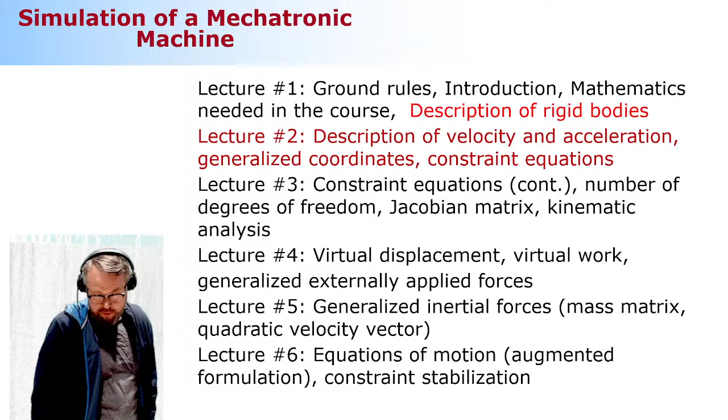Okay, let's get started. Multibody system dynamics — what is a multibody system? As the title implies, it's a system that consists of multiple bodies. But there's another requirement the multibody system has to fulfill: the bodies have to be connected together via joints. Joints limit the motion possibilities between neighboring bodies.

A crankshaft mechanism is a good example. The connecting rod isn't able to move as it wants, but according to the crankshaft and a piston. So it connects these two bodies together, and it has to do this connection job all the time.

So it cannot take a leave and go someplace else. That's not possible because it's connected to neighboring bodies. Those are called joints, which mathematically we're going to describe by relating the motion possibilities between the neighboring bodies.

It all sounds vague, but it becomes clear when we look at it at a mathematical level. That's going to be two weeks from now.

So in multibody system dynamics, we do not make any assumption regarding the magnitude of rotation. Seems like a simple thing, but it's not. Because if we are not going to limit ourselves to small rotations, it means our kinematics is going to be nonlinear, and our equation of motion will be nonlinear. That has serious consequences for our life.

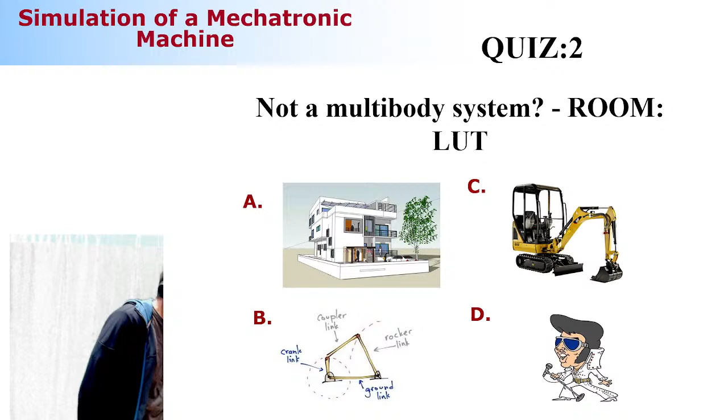What is the success rate today? How many of you will enter the correct answer? Is it going to be 100%, 50%, 10%? Statistically, is it 25%? 92, okay, the online participants too. We got 53 online participants, and I'm sure they're all very happy. Are they? They're not giving any comments whatsoever. Anyway, online participants, place the number in the chat window, and if you guess this correctly you can get 2 extra points. And the numbers are coming now, 94. We'll get back to the right number a bit later. So let me continue then.

Here comes the big picture. This is something you must understand very well. In dynamics, we monitor the situation with respect to a coordinate system called a reference coordinate system. Often you've heard about a global coordinate system — yes, that's a reference coordinate system. It has many names, but it's a coordinate system that everything is computed with respect to.

I can set the reference coordinate system to this table, and I can describe all kinds of motion with respect to that coordinate system. It's not absolute, because there is always motion — if nothing else, Earth is moving around. And because Earth is moving, it is itself a relative coordinate system, yet it's a reference coordinate system for me.

So with respect to the reference coordinate system — would you prefer to call it a global coordinate system? Is that something more familiar to you? Reference is okay, all right.

So with respect to the reference coordinate system, we have a multibody system — that's the mechanism we just described. It could be a connecting rod system or crankshaft mechanism, and it consists of a number of bodies. These bodies are connected together via joints, as you see here. There are different kinds of motion limitations: revolute joints, translational joints, screw joints, and combinations of these. So there are many different varieties, but they're all limiting the motion possibilities. That altogether is a multi-body system.

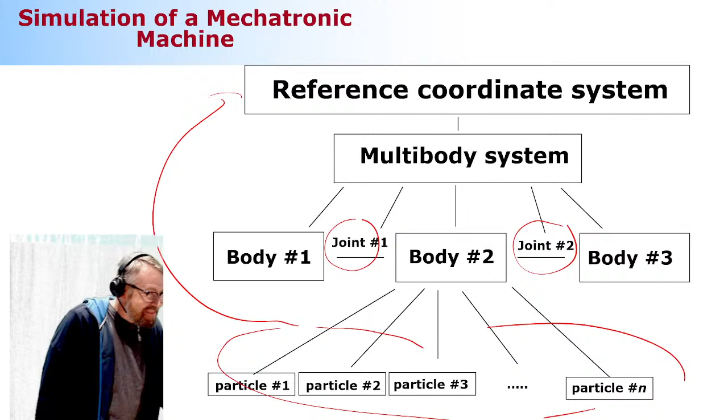Here it is. Here is my body A. So this is my body, even though it consists of an infinite number of particles. Today we're going to look just at 3 of them. Remember that in reality there is much more than that - millions, billions, trillions of particles. But let's, as an example, look at 3 of them to make our life easier.

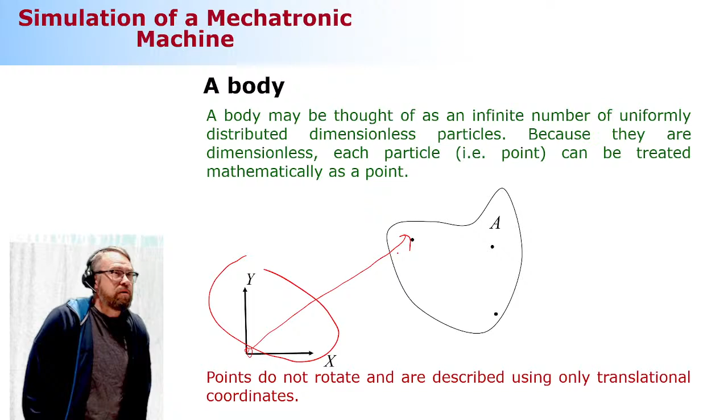So remember, what is our target? Our target is to describe these particles with respect to this reference coordinate system. This is not very complicated at all. How can we do that? We can say there's a vector leaving from the origin of the body - it could be the reference coordinate system - and ending at wherever the particle is located. Very simple. If I do that for each of these 3 particles, it looks like this. Not very complicated at all. So let's look at what this vector consists of.

This vector, obviously, because this is a planar 2-dimensional space, consists of how many components? 2 components, because in a planar case, a vector that starts here and ends here has a projection on the global x and y coordinate axes. These projections are the components of this vector. So this vector here is Rx, Ry - these are the projections. Rx is this projection, that's Rx, and this is Ry. Pretty simple thing.

So what about this guy here? How many components? 2. Correct, 2, because there's no difference. So these two consist of 2 components each. What are these components? Rx, Ry. So it's no different in that respect. What about this one? Same thing, so that's going to be another 2 components.

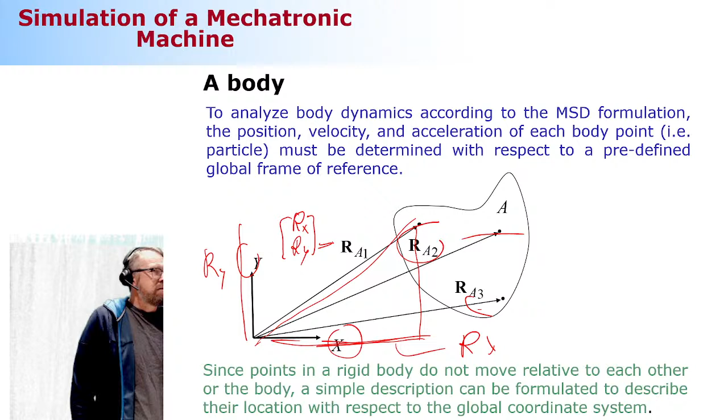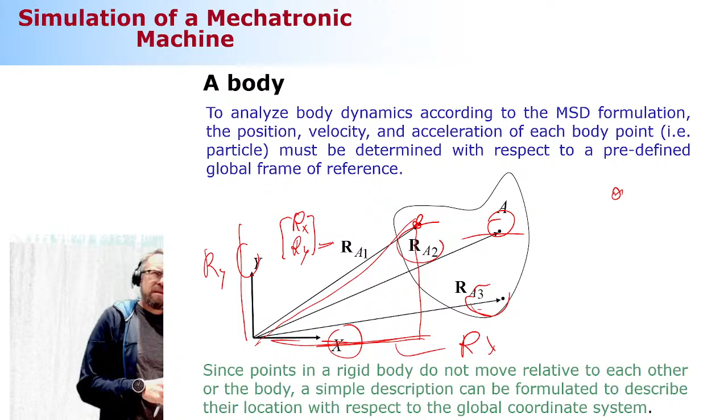So now when I have 3 particles, I need to use 6 variables. Where are these 6 variables coming from? Because this particle can move, and when it does, these projections change their numerical values. So it means these particles have to be described by 2 variables, Rx and Ry, each. The same holds for this guy and this guy. So it means I need to use 6 variables. It's still kind of doable, but remember, how many particles do I have in total? Infinite. So this is a no go. This is not possible, because no computer can solve an infinite number of variables.

They just cannot. It has to be simplified or described another way, otherwise computers will say, hey, this is too much computing for me. And we're still speaking about one single body, and we would like to have more than just one.

Okay, what is it that we can do then? Maybe we can use the fact that particles cannot move with respect to each other if we're dealing with rigid bodies. Rigid body means that no matter how force is imposed on the body, there's no mechanical deformation. Of course, you don't see that in real life - like this pen is pretty rigid, but if I apply a very big force, it will bend for sure. I'm not going to demonstrate that, but trust that it will happen. That's what happens in real life, but we are not here in real life - we are in a computational world. And in this computational world, we say that this is rigid. We're making an assumption that it's rigid, meaning the particles cannot move with respect to each other. They just cannot.

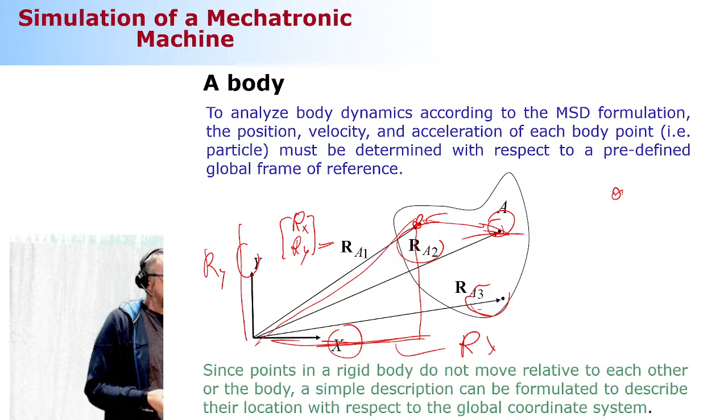Okay, maybe we can use that and introduce a second coordinate system. The second coordinate system is called the body reference coordinate system. What is the deal with this body reference coordinate system? Well, it is a coordinate system that is attached to the body.

So if the body moves, the coordinate system moves along. If the body rotates, it rotates along. It's completely stamped, welded, attached, however you want to call it, to the body. So there's no possibility for particles to move with respect to this body reference coordinate system. That's very good, because then we can describe each one of these particles with respect to this new coordinate system.

We can make it happen, and we can do that by using something that is a constant vector, called vector U bar. In my notation, bar stands for local coordinate description, and if there's no bar, it means it's with the reference coordinate system. And of course, if it is bold font, it means it's either a vector or a matrix. Scalars are written using italic font.

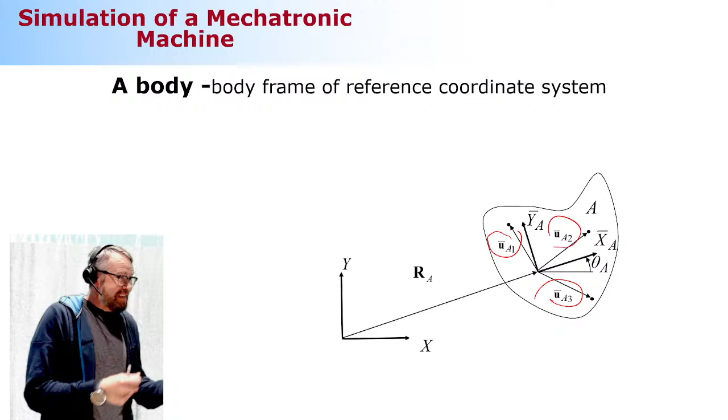Okay, let me take a look, Mustafa, what the... So online participants are not saying anything, meaning that they understand everything. They figured out everything a while ago. Yeah, there's a 5 second delay, but other than that, they understand everything.

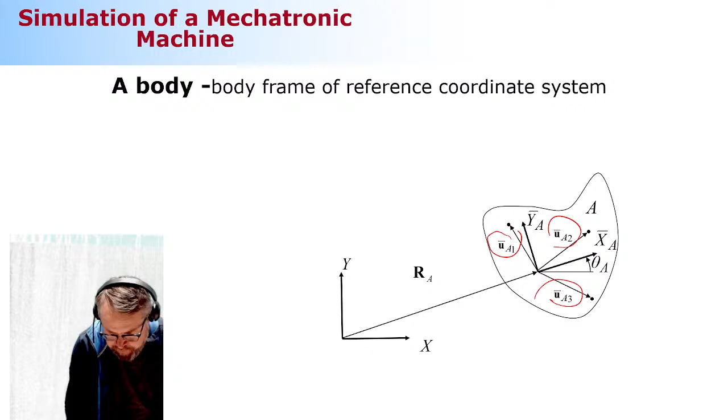Because the one thing is clear: if I add here a vector that starts from the origin of the reference coordinate system and ends at the origin of the body reference coordinate system, that's vector r. And if I add vector u bar there, that cannot give the same position. Why not? Because when the system is rotating, the vector u bar will go in this direction, and it just cannot be the case anymore. So what we need to do is build this relation.

And it's pretty simple mathematics, and that's what we're going to do next. So the mathematics goes this way. Now there is no body visible here, I only have two coordinate systems, the reference coordinate system and the body reference coordinate system. Let's call it the global coordinate system and local coordinate system for sake of simplicity. This is my global coordinate system, and this is my local coordinate system.

You see that the local coordinate system is rotated with respect to the global coordinate system by an amount theta. And then there's a vector described with respect to the local coordinate system, vector u bar. This vector u bar has an angle with respect to the local x-axis which is equal to alpha.

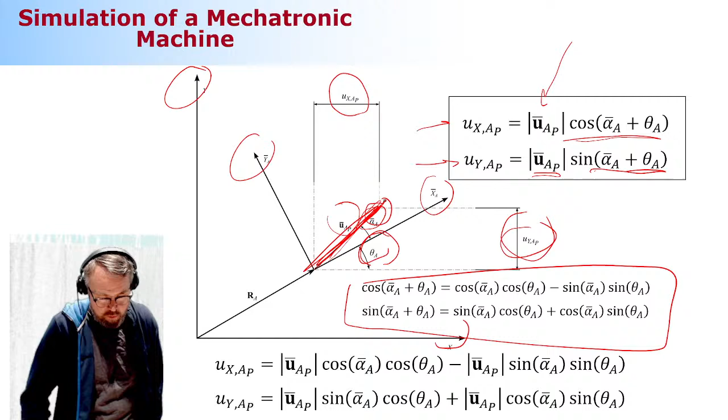So now using this relation, no thinking whatsoever. Remember, this course is not about thinking. As soon as you start thinking, you go wrong. You just go mechanically, okay? So I'm using this relation, and I can write this projection x and y as shown here.

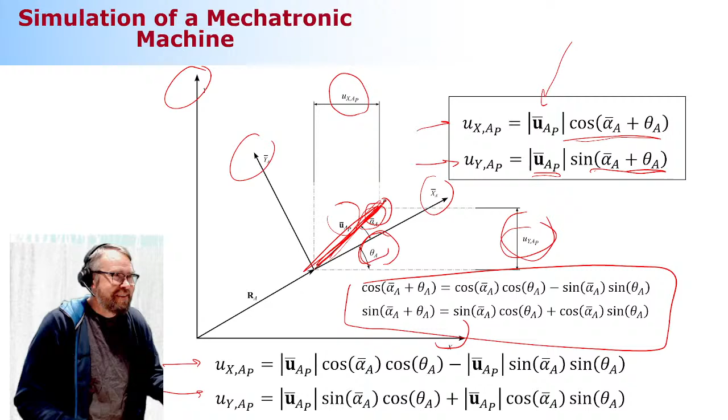Now I can see that it's a little bit of motion like this, so it's no longer just this. Okay, hold on, that all becomes clear in my next slide. You want to see it? Okay, it's this one here. So this is what I just got from the previous slide, and I got that with no thinking - I was just using this trigonometric relation, nothing else.

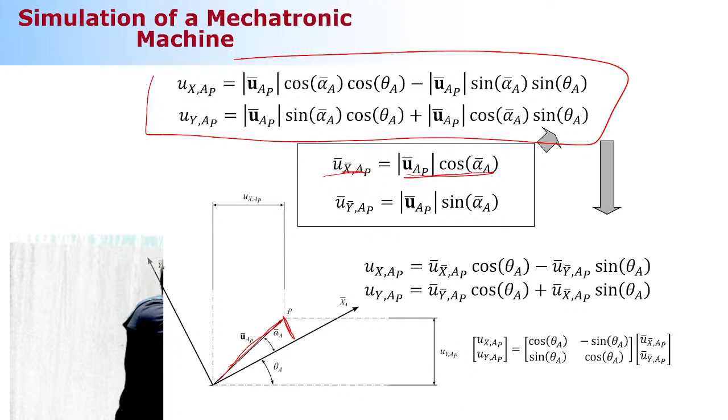Then, if I think about how is a projection of vector u bar x, which is this vector u bar, with respect to local x-axis, how can I write that? Well, this is pretty much the same thing I just did - it's the length of vector u bar multiplied by cosine alpha, this time just alpha because I'm here in my local coordinate system. And then I could do the same for the y component - it's the length of that vector multiplied by sine alpha.

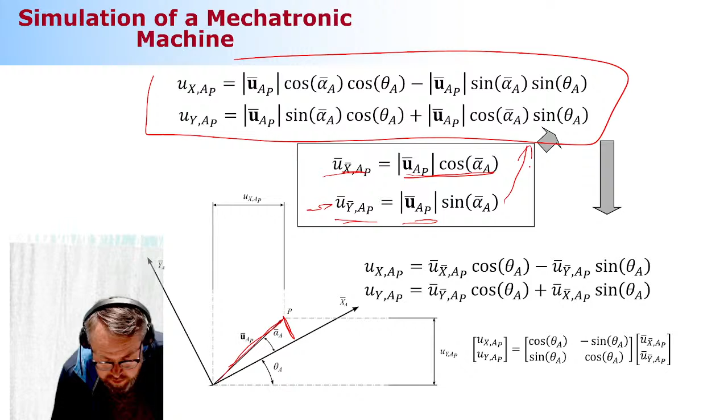So when I'm substituting that relation into the previous equation, I can express everything as shown here. We become very close to solving the mystery about two different coordinate systems, because if you look at this solution here, I have two equations which I can express using vectors and matrix. What are these vectors? Well, these vectors are the representation in a global coordinate system, this guy, and the representation in a local coordinate system, and something that converts local to global.

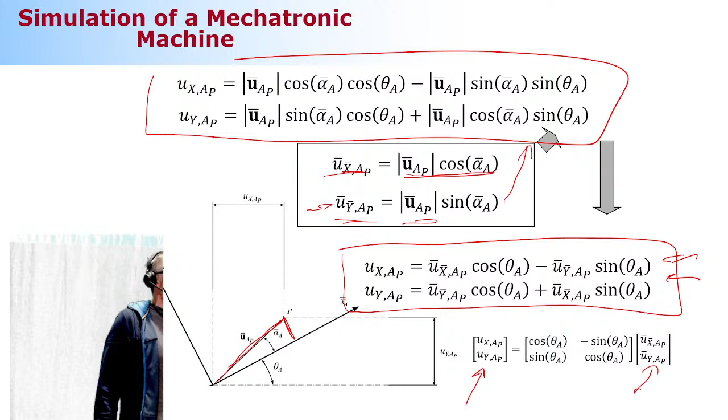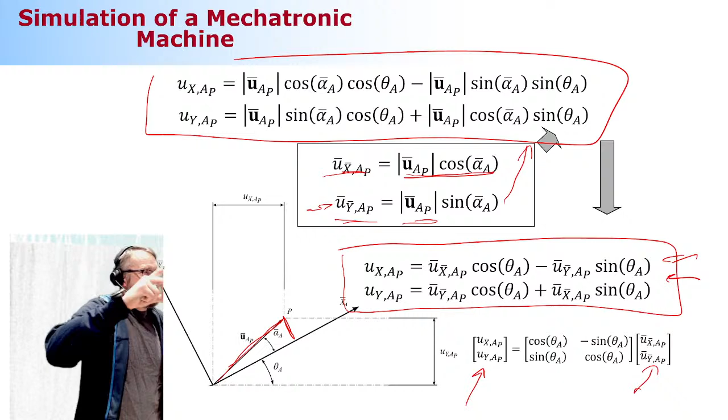This magic, called mapping in mathematics, is our 2x2 rotation matrix, which is doing the trick for us - converting vector u bar to be vector u. U bar, u. Let me show that in detail. This here is a 2x2 matrix, which is an orthogonal matrix.

So what does that mean? It means that if you form vectors out of the columns of the matrix, those vectors are perpendicular with respect to each other. Perpendicular means that, here in a planar case, they have 90 degrees of angle with respect to each other. They could be matrices in n-dimensional space which is orthogonal, and I cannot explain how that looks - just cannot. Leave that for the mathematicians.

Okay, so this is my rotation matrix. And if you look at the columns of this matrix, this column here is a representation of the local x-coordinate axis, and this one here is a representation of the local y-coordinate axis. That's why there are 90 degrees of angle with respect to each other, and that's why it is called orthogonal. They're also unit in length, which is another benefit, but we're not going to really deal with that benefit too much. But it's orthogonal, all right?

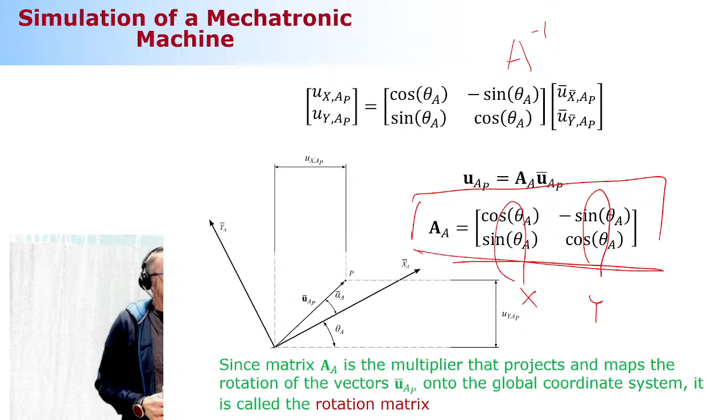So what is the deal with an orthogonal matrix? Why is it so nice, particularly in our case? Well, it's pretty nice because sometimes we need to invert a matrix, meaning we take this mathematical operation, which is typically a big pain, really big pain. But in our case, that is equal to the transpose of the matrix. That means we're changing the mapping direction from global to local, which we're really not going to use that much, but it's a possibility.

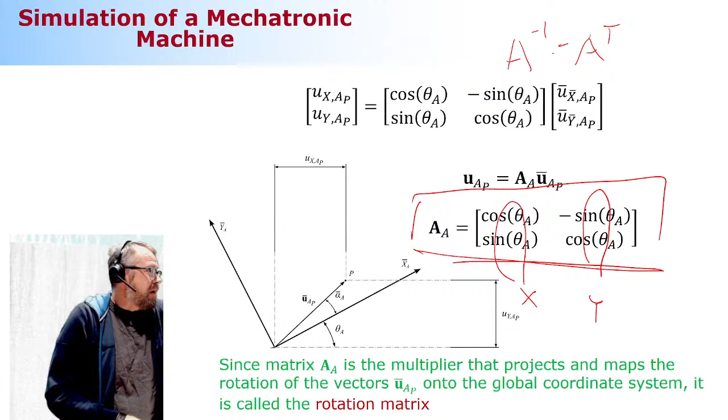Okay, so this is it - this is the entire kinematics. We can repeat this more than a million times. Okay, let me come down a bit - so it's less than a million, but many times. We will use this kinematics over and over and over again. Okay, let's take a look.

Here is my reference coordinate system. Here is my potato-shaped body. Here is my local coordinate system, and here's my particle. I want to describe this particle with respect to my reference coordinate system. The first thing I do is travel from the origin of my reference coordinate system to the origin of my local coordinate system, and I do that with the help of this guy here.

This is a vector that consists of two components: projection in x and y direction, like we did in the case of a single particle. But this time it refers to a coordinate system instead of a particle.

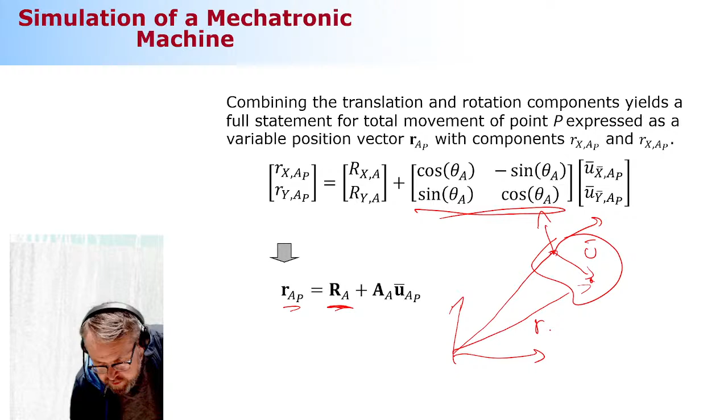Then I'm going to take the orientation of the body into account. How will I do that? With the help of this mysterious mapping matrix, called the rotation matrix. And then I'm describing the particle using vector u bar, which tells me where that is located. So this one here is R A, and this one here is the rotation, and this is the vector u bar.

Just testing out how long you can be quiet. It's pretty long. Okay, so... how would you say it? Pretty clear.

Let me tell you something. A week ago there was a university party, and at that party I got a certificate that I've been a professor at this university for 20 years. I've been dealing with this material way more than that, 35 years, and still every now and then I think, what is this, how does this come, how does it go. But when I'm explaining it to you guys, it becomes clear just like that. You guys have very big brains. Very nice, but no doubts, no questions, everything clear?

Most of our online participants, no doubts? Oh, that's not a question. Okay, so we continue then.

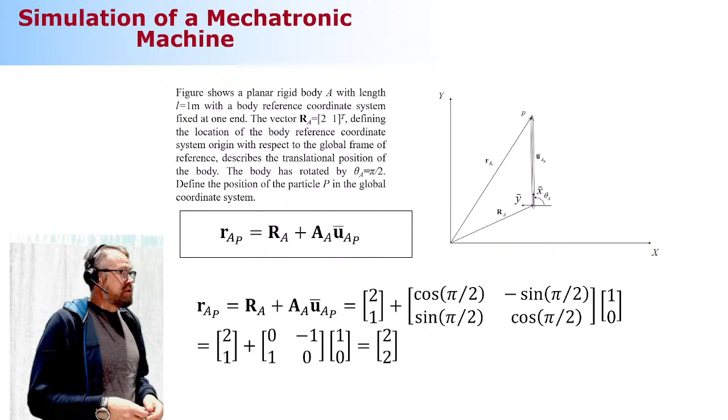Let's practice. This comes with a small font, but otherwise I think it's clear. I have here a beam-like body, and I'm asking where a particle located at the end of the beam-like body is with respect to the reference coordinate system when the configuration is as shown in this figure. All the information is provided; I just need to substitute the information in the right location and do the math, nothing else. Let's get started.

First thing, I need to look at this equation and substitute components correctly. What was the first component, what was this one here? This was where the local coordinate system is located with respect to the global coordinate system, that's what it is.

Is that information offered? Yes, it is: 2 in the x direction, 1 in the y direction. That's it. Then I need to know the orientation of the body with respect to the global coordinate system, that's angle theta. Do I know angle theta? Yes, it's pi divided by 2, 90 degrees. That is then substituted here, in these 4 locations.

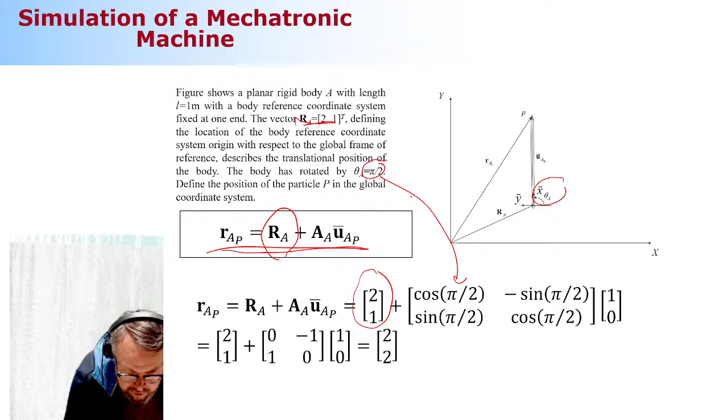Then comes the difficult thing, vector u bar. We know here that we are already oriented along the length of this beam-like body, so our x-axis is pointing this direction, and the y-axis is pointing this direction. How can I reach this destination here, which is point P, or particle P? How can I go there?

How much do I need to travel in the x direction? The length is provided as 1 meter in this direction, that's one. How much do I need to travel in this other direction? Zero. Correct, that's zero, it is zero.

I want to make you feel like, what the heck, that reading here is zero, and it is zero. And you do the math, that's it. Simple like that, it's a matter of substitution.

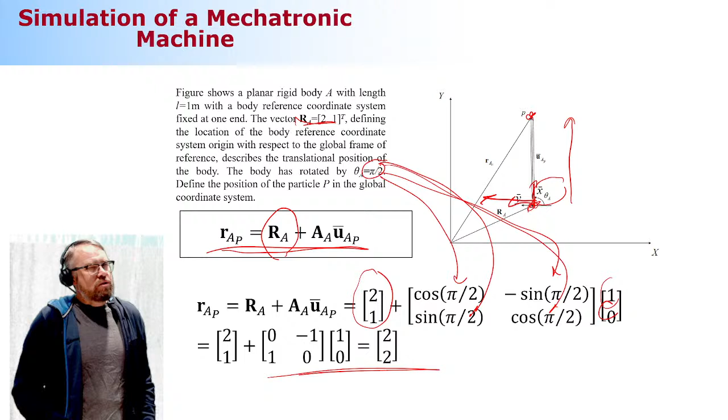You can play as much as you want with this equation, but you are not allowed to change this kinematics. You just cannot do that because this is a foundation, and everything is built on top of this foundation. If you decide you're no longer happy with this foundation and want to build your house differently, it will collapse. You're not allowed to do that, so you have to stick with this. This is the kinematics we're using. There are other ways to describe these particles, but we are using this one.

All right, next example, very simple too. It's a beam-like body, and now the body's local coordinate system, the body reference coordinate system, is located in the middle of the bar. By the way, in multibody system dynamics, where can we place the body reference coordinate system, the local coordinate system? We can place it anywhere we want. Sometimes it's beneficial to place it at the center of mass, sometimes it's not beneficial. Sometimes it can be within the boundaries of the body, sometimes out of the boundaries of the body. It depends heavily on your application, but we are not limiting ourselves to any specific way of placing the local coordinate system.

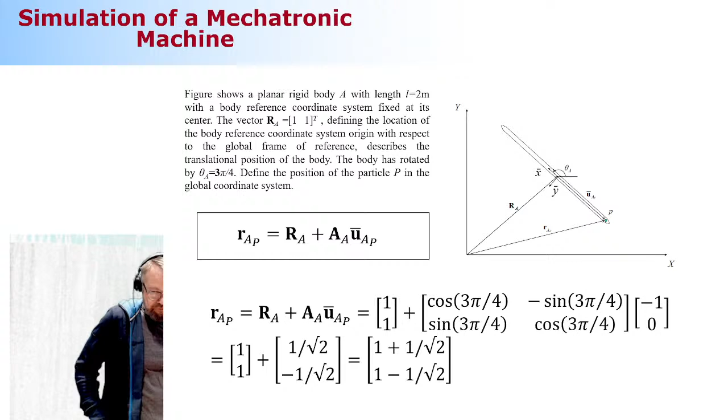Okay, here's my next example. Now this time the length of the body is 2.

And again, the information is provided. Translation between the local and global coordinate system is the vector 1, 1, which I'm going to substitute here. Rotation of the body reference coordinate system is provided as well, and it is 3 multiplied by pi divided by 4. That will go here.

Then my vector u bar. Put yourself in the position of the local coordinate system, in the orientation of the body reference coordinate system. Your nose, meaning the x-axis, is pointing this direction. Your y-coordinate axis is pointing this direction. How much do you have to travel to go here, from here to here? That's obviously half the length of the body, which is 1, but in the minus direction, because x is pointing the opposite direction. So it's minus 1.

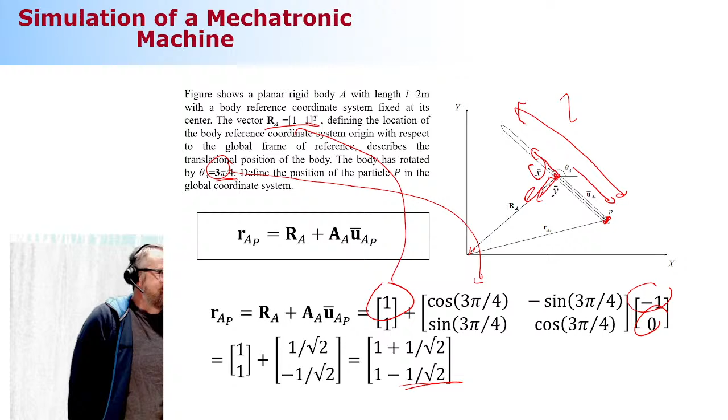How much do I need to move in this direction? Zero, because I'm already in my body reference coordinate system. That's 0. The rest is downhill—just a symbolic math tool, and that's it. That's all you need.

I have a question. The local body system, you said we can place it anywhere and in any direction. Correct. If we placed it the other way, would it be 1 then, or minus 1? It will be 1, yeah. The only thing you cannot do is that once you have made this decision, there is no way back. There is no return. So you have to stick with this decision for the rest of your life—it's a big decision.

So you are saying that this one here is equal to 0—that's what you're wondering. For online participants, why is this equal to 0? The answer is because we are putting ourselves in the position of the local coordinate system, in the same orientation as the local coordinate system. So forget about the rest and put yourself in that coordinate system. In that coordinate system, you should not travel at all in the transverse direction—you need to stay in line with the x-axis. That's what it is. Things would be different if I had this kind of body. If I would have a body reference coordinate system here, and my particle would be here, it would be a completely different story.

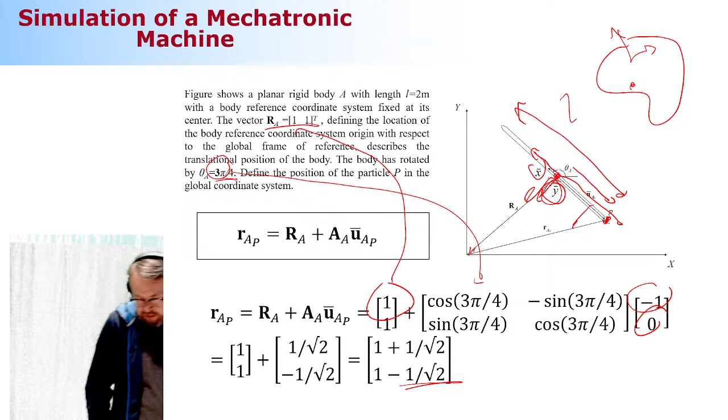The other question was, can you please repeat how we got U bar? Okay, we'll do that. Vector U bar is a kind of mysterious component—it's like a good friend, but at the same time a little bit strange. Why? Because what U bar is doing for you is defining a particle with respect to the body coordinate system. Let's take a look at the box-like body.

This is a planar body, and I wanted to define the particle that is located here, this one here. I'm placing my local coordinate system at one of the corners of this box-like body, the lower left corner to be specific. How can I do that using the vector U-bar? Well, the vector U-bar travels from here to here, and it would be completely different. This, by the way, goes back to your question too—if I place my body reference coordinate system at the center of mass of the body, now the vector U-bar will be very different.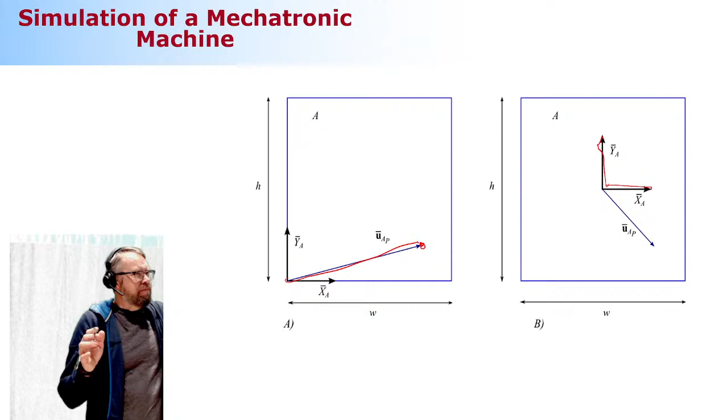Why is this vector U-bar weird? It's weird because there's an infinite number of particles, and I want to describe one. What if I would like to describe more than one? This vector U-bar will do the job by scanning every single particle within the boundaries of the body. How does it happen? Because this is a continuous system, we are not going to sum up all these particles because that would take too much time—simply too much, because there are millions and billions, and what comes after billions? Trillions. What comes after trillion?

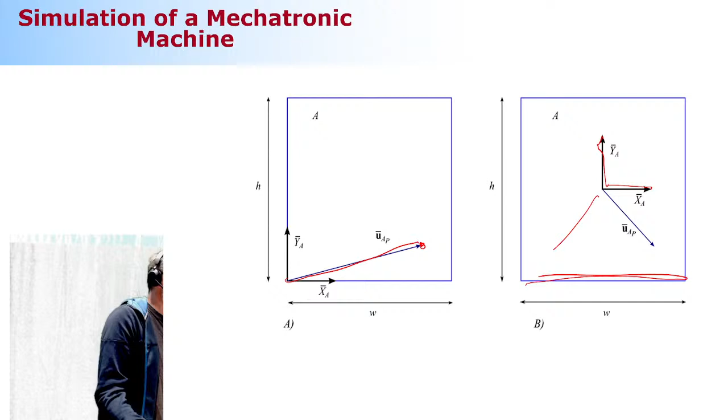Many particles, so we cannot sum them up, but we can use integration. That's how we're going to take all these particles into account. We're going to scan every single particle by using integrals, which I will explain later, not today.

You were not listening to me. This is my second time. I couldn't prepare for it. All right, so we can get back to that.

Role of the rotation matrix. Now I'm going to take a look at the success rate of the previous in-class quiz, but this is a new one, so let's take a look. And the alternatives describe the rotation of the particle.

Be very careful, and please communicate with your fellow student about what that is doing for you. Is it describing the rotation of the particle? Remember what I said about the particle, remember this, the role of, or how the particle is related to rotation. Try to memorize that.

It maps the body reference coordinate system and the global coordinate system, so it's mapping two different coordinate systems. It maps the body translation and rotation, so maps the translation and rotation. It describes the translation of body A. Only one is correct, but which one is correct? And how much is the success rate?

Go and discuss, discuss. You can come and discuss with me. No, you cannot, because you end up being on YouTube. But I can step aside and we can discuss. No, you don't want to be my friend.

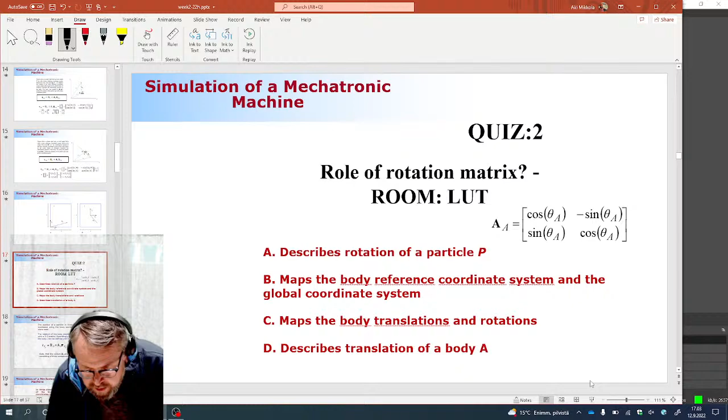You don't see this at all. Okay, let me go back, I will leave you to think about this. And now I need to think about how this was. I think of first this, then this, and then...

P... duplicate. Okay, so 95 was the correct success rate.

Is it going to be 100% this time? For sure not, absolutely not going to be 100%. But how low will we go? What is your estimate? 90%. 70. 70 is pretty low, but this is difficult because the way I made all these things to confuse you about the rotation of particles and all that, you're thinking, what is the correct answer?

Online participants, use this WhatsApp to communicate, because I really would like to see 100%. We're going to take a still picture, I'm going to send that to the Rector. Look at me, best teacher ever.

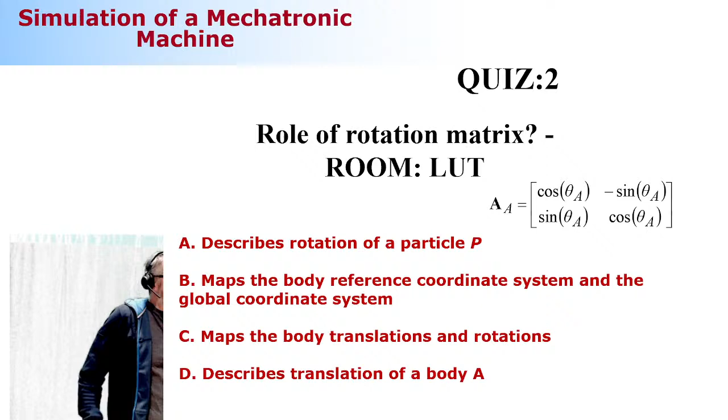Okay, so we go. All right, then I have a short story here. Oh, I see that it's already 5 minutes past 5 o'clock.

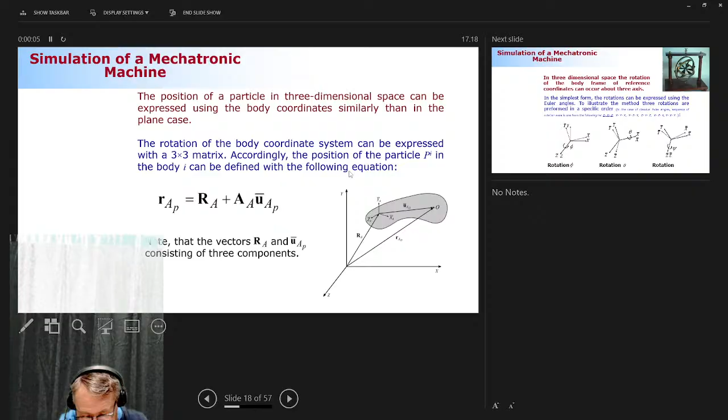Okay, all right, let me take myself back to this one... ah, no, I don't want to use this screen, just a second, I need to take this off. This is weird, that I need to use this sequence to connect myself. Okay, not yet. Duplicate. Here it goes.

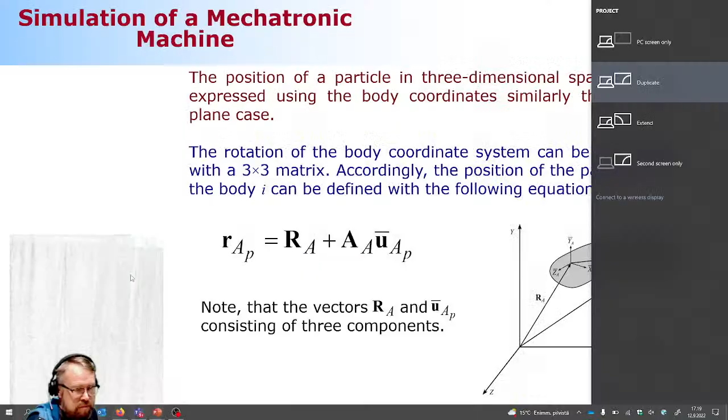Okay, short story — I'll keep this short because we have a long way to go today. We still need to discuss velocity and acceleration and all that. So, short story: what about the spatial case? What about the three-dimensional case? How can we do the rotation and describe the particle in the case of...

...the spatial system? We can do that in exactly the same way as in the case of the planar system, so no difference whatsoever. But of course there's a difference — and how is it different? It's different because the dimensions will be different, of course.

Vector R will have a projection along three axes now, not two: X, Y, and Z. So this vector consists of three components. The rotation matrix will be a 3 by 3 rotation matrix, and vector U bar also has three components. That's the only difference.

There is a big problem here, and this is a true problem maker: rotations in three-dimensional space. People have devoted their lives to figure out the mystery about these rotations, and it's still not solved, because mathematically it is amazingly difficult to describe. It comes with complications related to computational mechanics. The fact is there's no description that is superior at the moment—there are many good ones, but none superior.

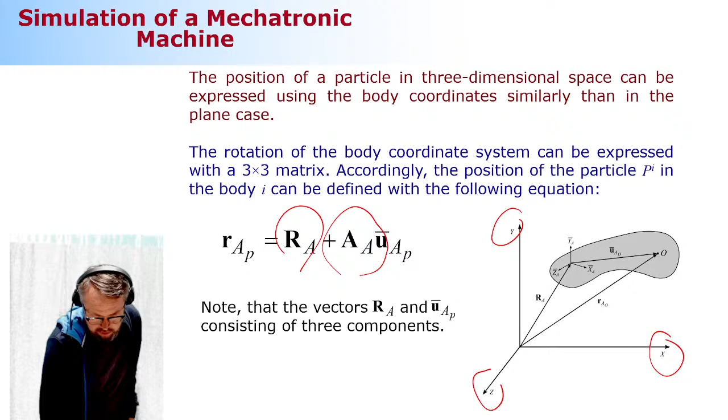The best way to describe Euler angles is by using two coordinate systems that are initially parallel with respect to each other. What I will do is take hold of the z-axis and introduce an amount of rotation, phi, which takes place around the z-axis. Then I have a rotated coordinate system.

I'm going to introduce a second rotation, an amount theta, this time along the x-axis—the once-rotated x-axis to be specific. Then I take my twice-rotated coordinate system and introduce one more rotation, psi, again around the z coordinate axis.

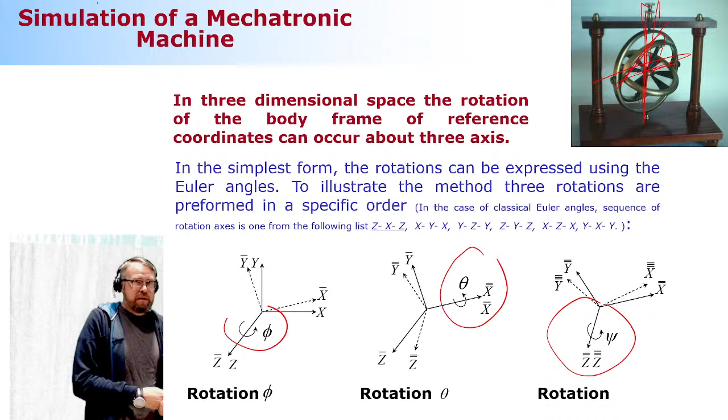There's a problem, and you can already see it here: it could be the case that two gyro axes end up in the same line—parallel with respect to each other—and then you cannot differentiate what is what. This is called gimbal locking. There's a lot of stories about gimbal locking, which is really the inability to describe rotations in three-dimensional space. There are some other promising techniques where this isn't as serious a problem, but generally, when using three rotation parameters, you will have this mathematical difficulty: the inability to describe rotation in a certain configuration.

How can you get rid of that? By adding more parameters. Most modern computers don't use three rotational parameters, but four. How come? Because as far as I know, a body can rotate three different ways, so where is the four coming from? This four comes from the fact that these four are not independent, but related to each other by a relation that combines them together. Those are often called quaternions, which we are not going to touch in this class. That will be later.

So let's look at the sequence again. Now listen to what I'm saying. Put everything aside. Online participants, close Netflix or whatever you're doing in your other eye, and listen to me. So we use a sequence which is Z, X, Z, coming from the gyro. Okay? Z, X, Z. Clear?

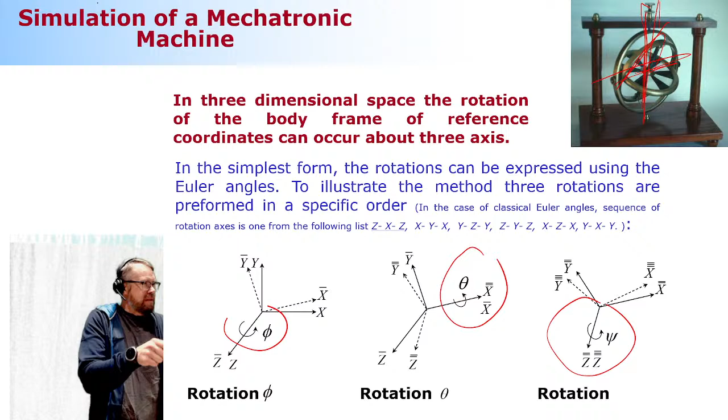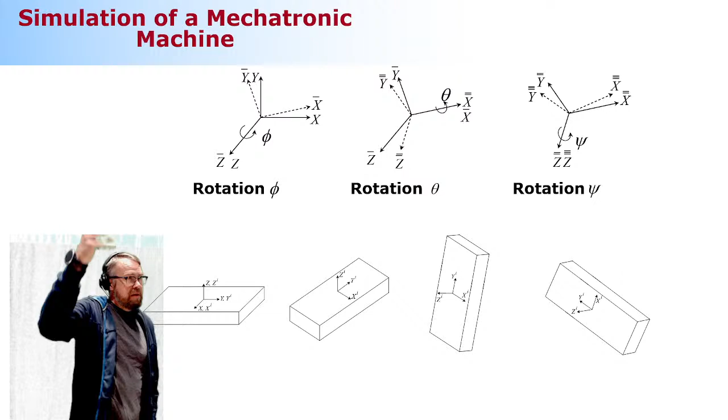All right, let's continue. This is how it works. So we have these three rotations, and you can put your body or your box in any orientation you want. One more note here: what kind of coordinate system are we using? Left-hand or right-hand coordinate system?

I know there are a lot of differences there, but for some reason I'm a big fan of the right-hand coordinate system, and if you see some figures in my YouTube channel, I'm using this. This means the coordinate system, this is a positive rotation. And I also like gangster rap very much, so next time we see each other, this will be the way to say hello to me. But don't say hello, say respect. Okay, respect. How you like that? So a lot of respect.

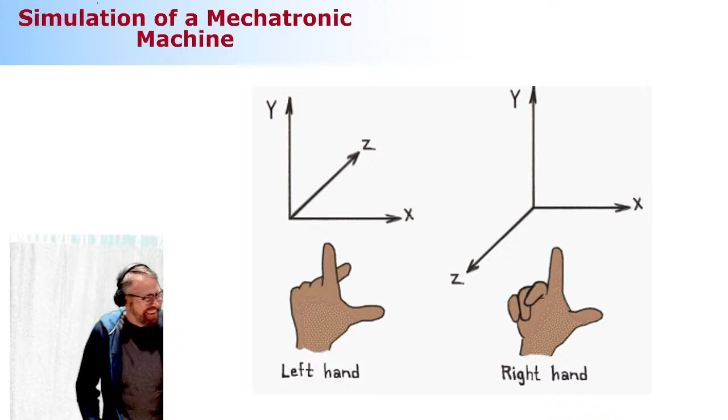Okay, let's get back to the real deal. That would make me feel very, very good. And remember what makes me feel very, very bad? Asking about how my particles are doing, rotation-wise. I'm not gonna like that. Okay, so here it comes.

So what can we do to make this a mathematical expression? Each one of these rotations we can describe using a 3 by 3 rotation matrix, which is something we're kind of familiar with, because the first rotation, remember, is along the z coordinate axis. This means the last column here will be the z coordinate axis. If you look at the submatrix located in the upper left corner of this 3 by 3 matrix, you already know that from the case of a planar system.

Second one, x-axis, so the first column is x-axis, a 2 by 2 submatrix, something you already know, but this time located in the lower right corner. And one more time, z-axis. The difference between this one and this one is that I'm using phi and psi. Phi and what? Psi. You read it, I don't need to pronounce that, you just read it there from my slides.

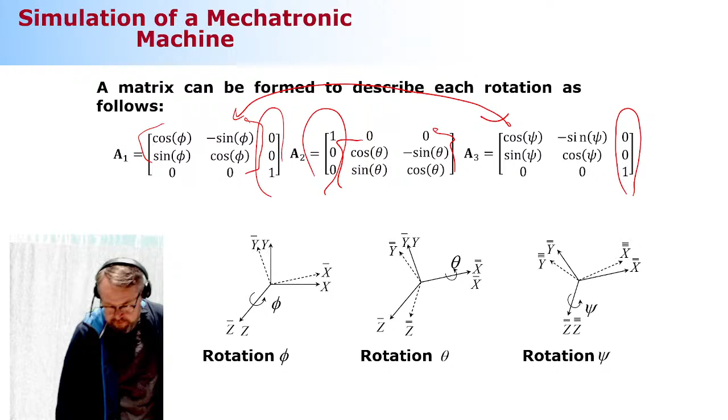Let me see, when I multiply these matrices together, this is what I get as a result. Now you're terrified, like, oh my God, do I need to memorize this? And the answer is no, don't do that. Memorize the concept, memorize the story of how you end up with it, that's what I'm expecting you to know, but not that. Also, in the written exam, you're allowed to use all material, lecture notes included.

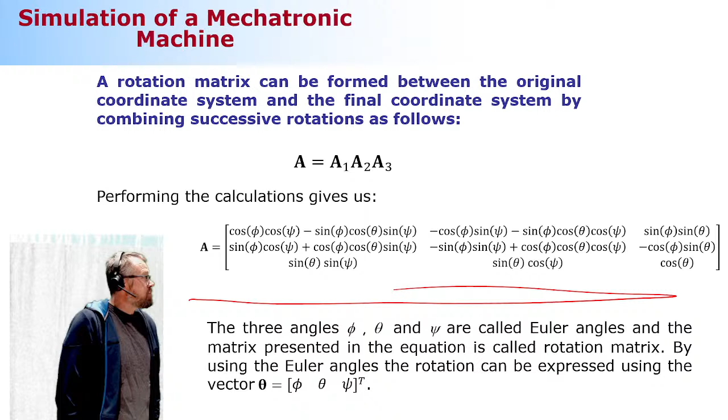So that's my 3 by 3 rotation matrix, which is based on 3 parameters, Euler angles. That's how it goes. Remember why I was repeating this a number of times? What sequence did we just look at? Was it x, y, z, z, y, x, z, y, z, or z, x, z? This is testing your memory a little bit, and also how well you listen to me.

Okay, let me take myself back to... and again, for those in the lecture room, I need to apologize because this is going to break your view. Next. Okay, I will leave it, and I will get back to that momentarily. You see nothing.

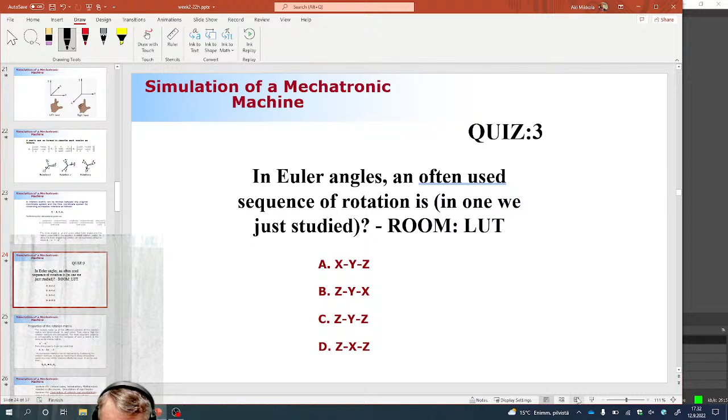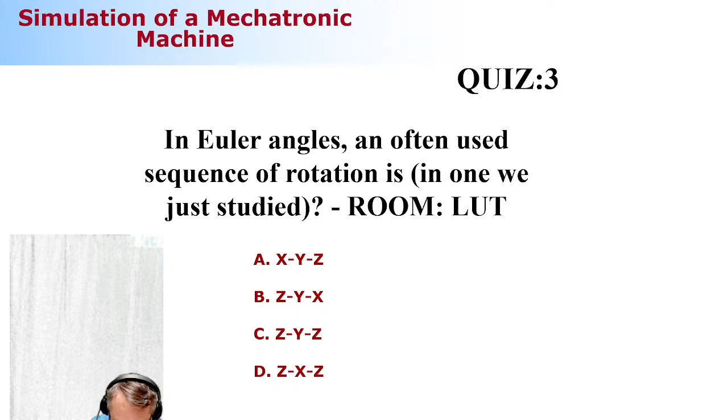Need to do this. And please communicate, and please make friends. Because you can go there and ask these guys back there, like, okay, what do you think? What do you think? And you can always come to be my friend.

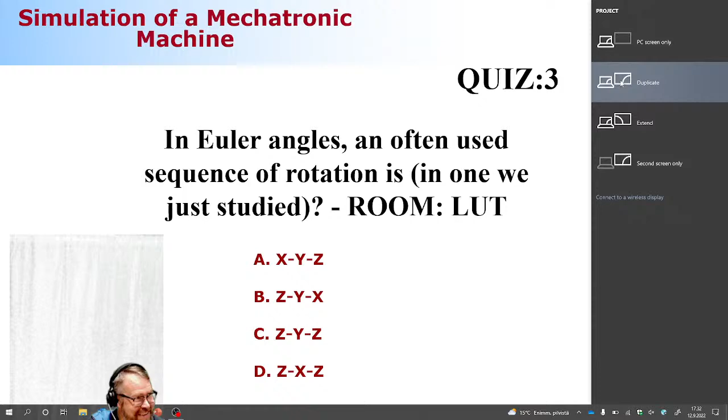Okay, a little bit of what I already explained to you. I said already that the rotation matrix is orthogonal, meaning that the inverse is the same as the transpose. That's pretty nice. What that means physically is that the mapping order will be changed. It will be switched.

Okay, if that's the case, if you have a rotation transpose of the rotation matrix multiplied by the rotation matrix, or the other way around, that's going to be the identity matrix. The identity matrix is a matrix where diagonal components are equal to 1, and the rest are zeros.

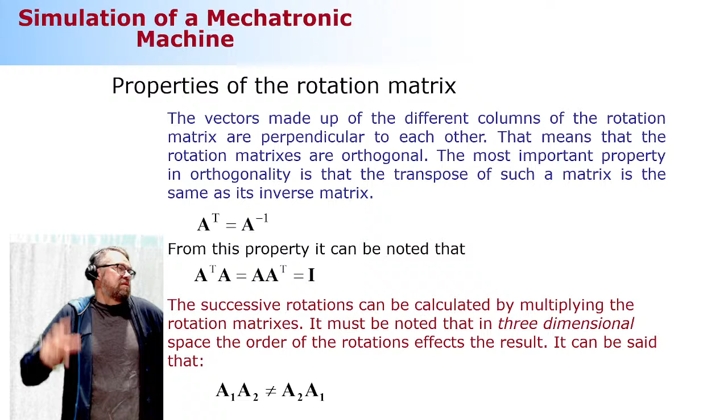So then rotation order is something that you cannot change in three-dimensional space. In two-dimensional space, there's only one axis where rotation takes place, so that makes no difference whatsoever. But in three-dimensional space, you cannot change the order of rotations.

And by the way, the game is on too, about the success rate. How much are we going to get for the success rate in that in-class quiz? I don't know, because I got the answers here, which is like 86. There's 100%. I always vote 100% because I trust you, big time. Always.

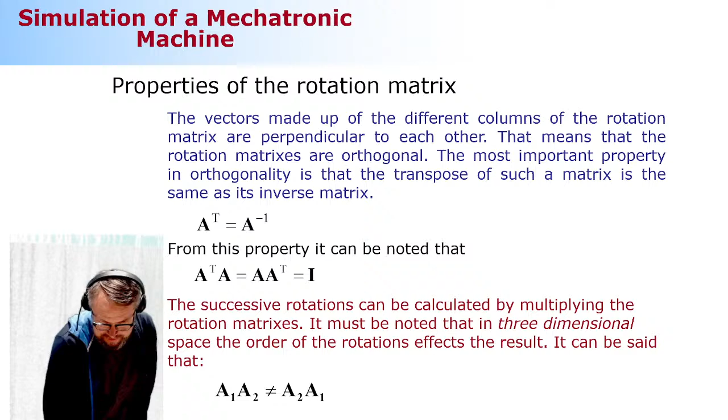Okay, finally we're in lecture number 2, and I know I'm very heavily left behind the schedule, but that's okay because the next story is very simple. Like I say, it's just math. We really don't care about math in any way other than as a tool that helps us do the work. But the tool is not the main priority in this course. It's just assisting us, nothing else.

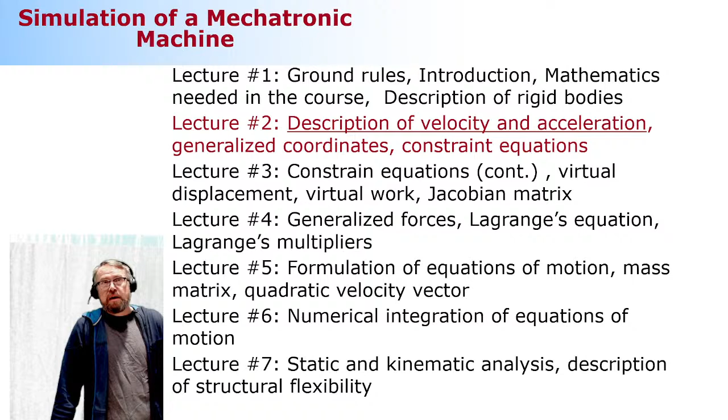Okay, so we're going to get the velocity and acceleration. Like I say, we have the description of a particle. The velocity of the particle you get by differentiating that with respect to time. Not very different, not very difficult at all.

Okay, and how it goes. Let me see what they say about it. There is a rotation of particle. Somebody is again saying rotation of the particle in that window. Not my friend, that's for sure.

Okay, velocity. Like I say, we're going to take the kinematics we learned a little while ago, and we're going to differentiate that with respect to time. Okay, what is it that we learned? This one. This is a description of a particle. And once you differentiate that with respect to time, what are you going to get?

Okay, so the first one, you differentiate this vector r with respect to time. You will get something that is called translational velocity.

It's not changing, because it's constant. It's not describing particle motion with respect to the local coordinate system. That's not possible, because we're speaking about rigid bodies. That means this last component will be deleted, so we can get rid of that.

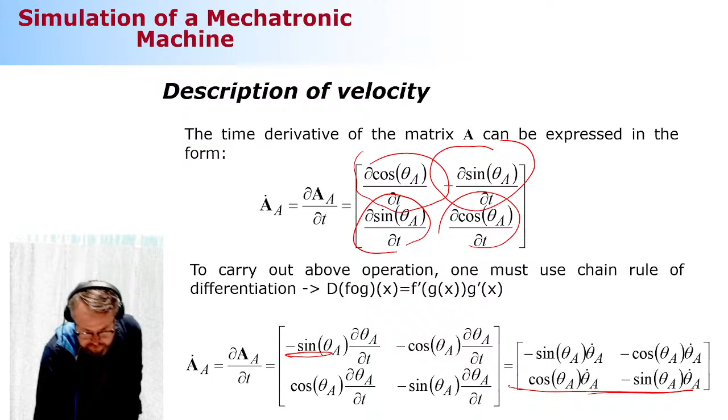No, it's not cancelled, but it's angular velocity of what? Body. Body, correct, it's a body. Because rotation does not rotate, no rotation of a particle. Okay, so that's what it is. So I can write this whole thing as shown here. And I can call this guy here, which by the way is a rotation matrix rotated 90 degrees, pi divided by 2, in the positive direction. That's what it is.

Okay, so I can call that rotation matrix A sub index theta. I don't know what's a good name for that, but that's what it's called. And this is something that is angular velocity. Angular velocity. Okay, but obviously angular velocity is with respect to this guy here. We're going to take a look at that then graphically once we look at the accelerations.

Okay, very mechanical mathematics.

Do you make any thinking? Please do not, just look at what I'm getting. I will do all the work for you, you just sit down, and that's it.

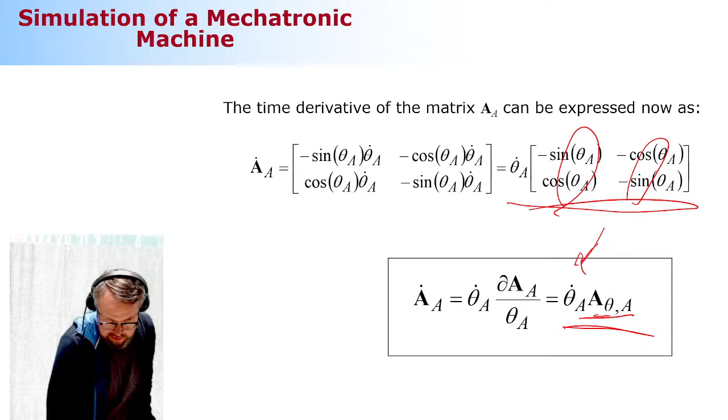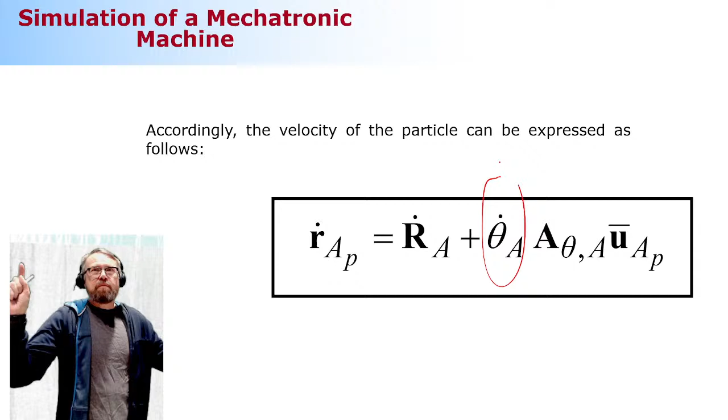Everything will be fine. This is our velocity: two components, translational velocity and angular velocity of the body reference coordinate system. That's what it is. Okay, let's continue.

Acceleration. We need to do this mathematical manipulation one more time. We're going to take this component and differentiate it with respect to time. We will get translational acceleration, R dot dot. That's what we're going to get.

Then we have here three components. This one is constant, so I don't need to care about that, but I do need to care about this one and this one. Using the same technique I used previously, I can first differentiate the one in the middle, and it's going to read like this: angular velocity multiplied by rotation matrix sub-index theta dot. How complicated is that? Easy to read, complicated to spell out.

And then this one, when I'm differentiating this angular velocity, that's going to be angular acceleration. Now you need to trust me when I say this relation holds. Once you do this differentiation, there are details available in the lecture notes, so if you do not trust me, take a look at the lecture notes. This component in the middle can be expressed as shown here.

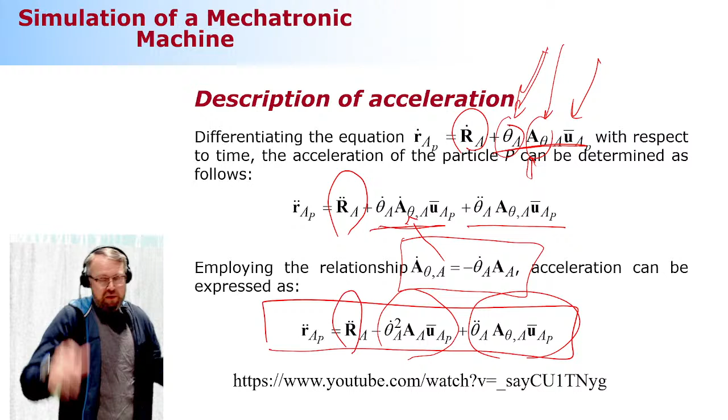Let me make you a rotating disk. Here's a disk which is rotated to ground, with a revolute here, like this. And if I rotate this potato-shaped body, and if this particle could be moved with respect to the rotating body, I would experience Coriolis acceleration. But that's not the case here, because vector u bar is constant.

Sometimes people get confused and think of Coriolis acceleration due to the rotation of Earth. That's something we really don't use in mechanics. It is true that when I'm walking here, I am experiencing a certain level of acceleration due to the Coriolis effect, because I'm moving on planet Earth.

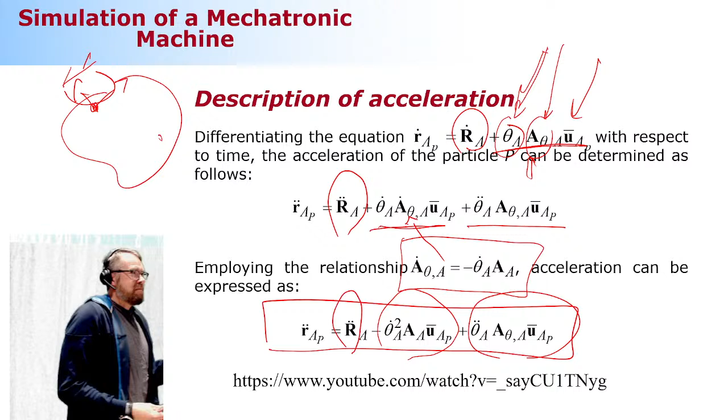And they say that sometimes students can feel it very strongly on Friday evenings. You need to drink a lot of alcohol and then you feel it, and it makes you so confused that you have a hard time walking straight. I don't buy that, because the amount of acceleration you experience in that case is insignificant. But anyway, we don't speak about that - that's another story we're not going to touch here.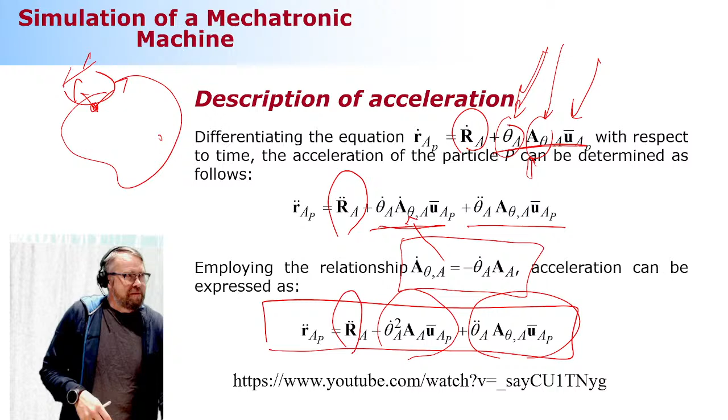It is needed in aerospace applications, but we don't need it here, because we speak about mechanics and mechanisms. If you want to learn more about Coriolis acceleration, take a look at the YouTube channels offered in this slide.

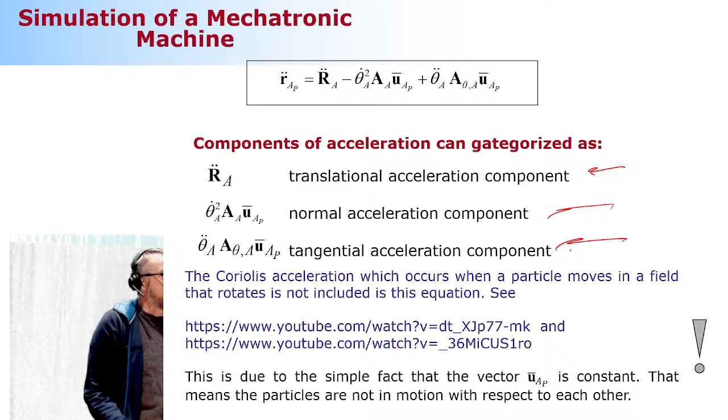But the names of these acceleration components are: translational acceleration, normal acceleration component, tangential acceleration component. Let's take a look at how they are. This, by the way, is this - the two dots. Tangential acceleration component: think of the system rotated with respect to the local coordinate system, so the tangential acceleration component points in the tangential direction of that rotation.

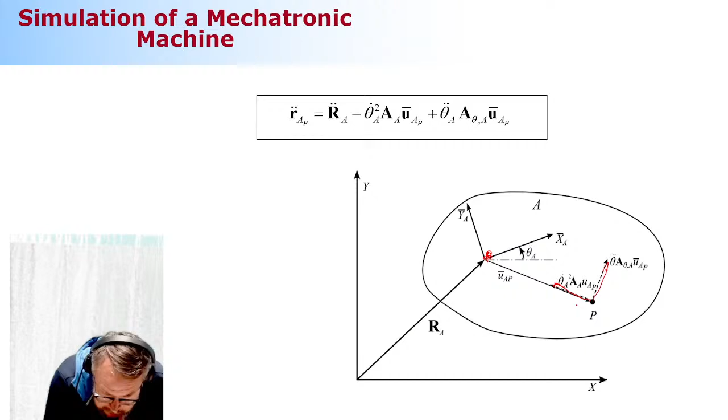This one here is the normal acceleration component, which you get by differentiating this vector. Let me go back here. Yeah, it is correct - it's along this line here, so you can get that as a function quadratically related to angular velocity. That's how it is.

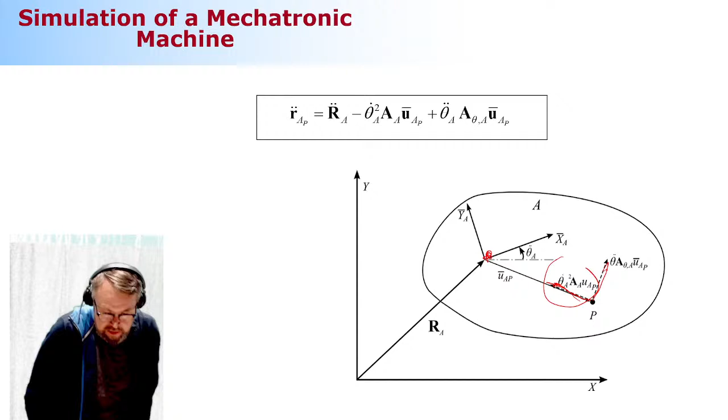Those are the acceleration components. This was minus in this direction, so if you put minus, it's pointing this direction. Okay?

What we're going to do then, many lectures from today, is create the equation of motion. An equation of motion, simply speaking, is this: external applied forces equal mass multiplied by acceleration. So this will be substituted here, and we will get the equation of motion. Not now - we are not ready for that. That's too hard for us today, and next Monday too. But slowly we become strong enough that we can handle something like that. Not today.

Okay? What do you say? Let me ask you this - do you still have can-do attitude? Very much so. All of you, online participants, do they have can-do attitude? No sign. Okay, all right then.

All right, I see that I'm running out of time, but let me explain something very important. Please pay attention, because this is what you definitely need. The next story is called Generalized Coordinates.

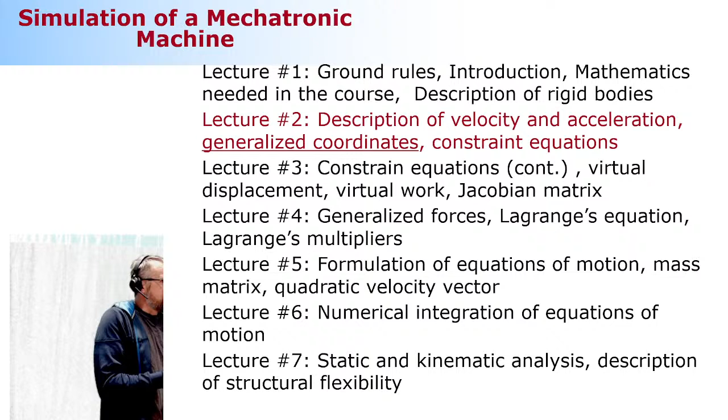Because we have to have these variables - variables are unknowns, something we're solving using either kinematic analysis or dynamic analysis. So what are the unknowns? We need to go back to the kinematics, which is this one.

So what are the unknowns? If I know certain components, I can tell what is the position and orientation of each particle in the system, as mentioned in this equation. So I need to go slowly through each component and identify whether or not it is a variable. A variable is something that can change its numerical value when the body is translating or rotating, or a combination of both. So what are the variables?

Okay, first component - this one describing the translation. Let's think about this potato-shaped body here. No motion limitation, it can go anywhere it wants. So what about these two components associated with this vector R? Are they variables or not? Can they change their numerical values or not?

Okay, now obviously I got you guys confused, so let me go back. We have this potato-shaped body here. By the way, it's so great that I'm finally back in the lecture room, because I've been doing this for 2 years and I'm explaining without seeing your faces - when I do see your faces, it's like terrified, then I know, okay, now I need to slow down, I need to do it again. These online participants don't look good. Okay, let's go back and take a look at this potato-shaped body.

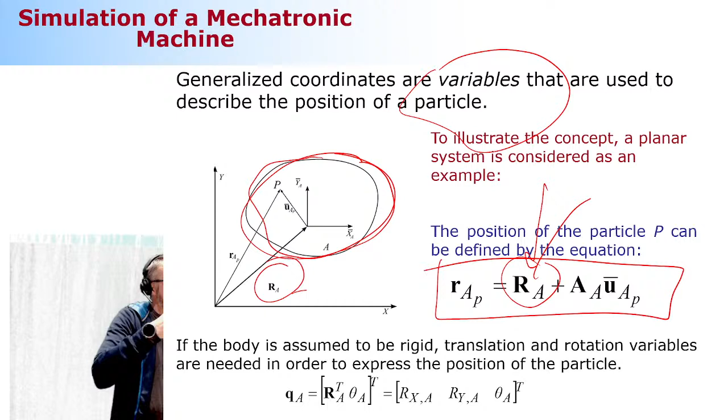So it's something we must know to identify the body translation and rotation - body configuration, in short. Okay, then comes this guy - there's one parameter associated with this 2x2 rotation matrix, which is angle theta. Is that a constant or a variable?

Let me hypothetically ask - you guys are voting variable. What about Team Finland back there, what are they voting? Let them speak. Is it variable? Yes. Okay, so it is variable, because the body can rotate, and when it rotates, what happens to angle theta? It changes its numerical value.

Simple like that. One more component left - vector U bar. What is the name of your team? Team Blue is saying constant, not variable. Team Finland is also saying constant. It is constant - it does not change its numerical value because we're dealing with rigid bodies.

Okay, so now let's make a list of all the variables. We figured out that vector R is a variable, meaning both components of this vector are variables - Rx, Ry. One more, which is angle theta. If you know these three parameters, three variables, you know everything - not everything in life, but you know where the body is located and what is its rotation. That's all we need to know in mechanics. If I have one body, I need three variables, which are called generalized coordinates.

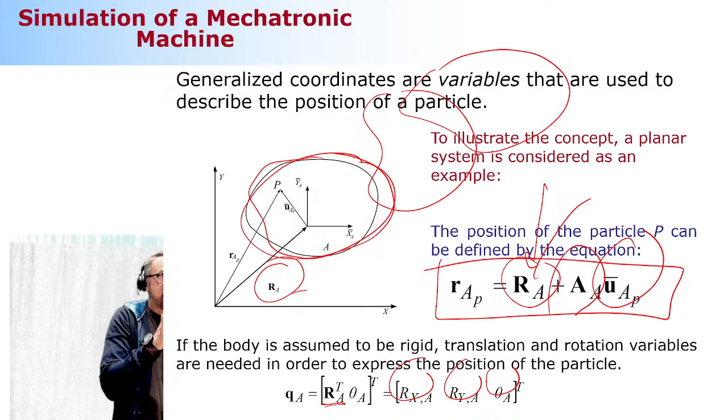Now, one body, three variables. Let me repeat this one more time because next in-class quiz, I'm asking this. I need three variables that are Rx, Ry, and angle theta. Clear. Now do this. Okay? All right, this is a special case which I'll get back to. Body A. How many are needed? And what are these components? Look at the number, and if the number doesn't match, you're in trouble.

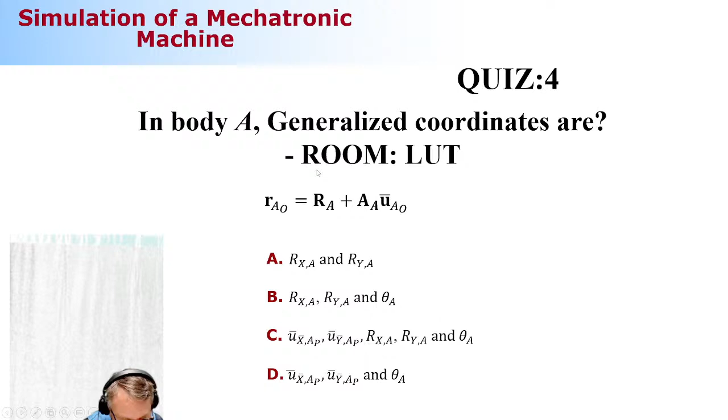Okay, let me take myself away from this one. Hold on, lecture room. I will get this back to you so you will see this momentarily. And that's where we're going to stop today. This is the last thing.

Okay. All right, so I need to take myself to this one. Euler angle. So how is the success rate? It's really good. Pretty good, yeah. 100? Above 90. You know that we will never reach 100. Okay, a year ago there was a big claim that I'm the one that intentionally answered incorrectly. You said that I'm not the one. It's all about you. Yeah, I know who is in charge for that. Ooh, very high. I got scared because of this dancing and 100%. Ooh, close case.

Okay, let's move on to the next one, which is generalized coordinates. And now you need to see them one more time. Let me show it to you. Here it is. Okay, let me see how this looks for online participants. So the delay is something like, yeah, this looks pretty good. Okay, think about the number. Think about U bar, and you will go the right way. What are the variables for one single body?

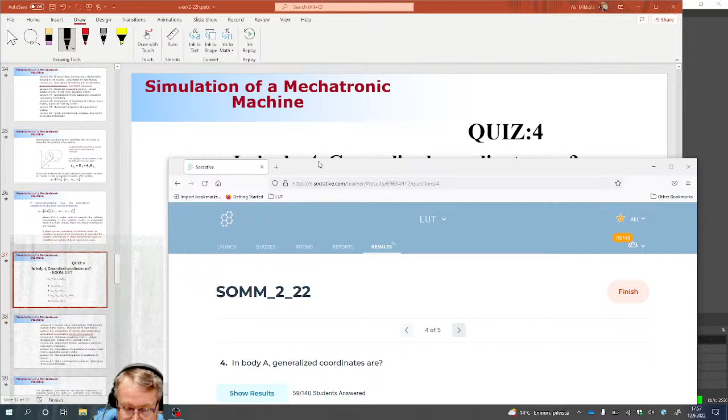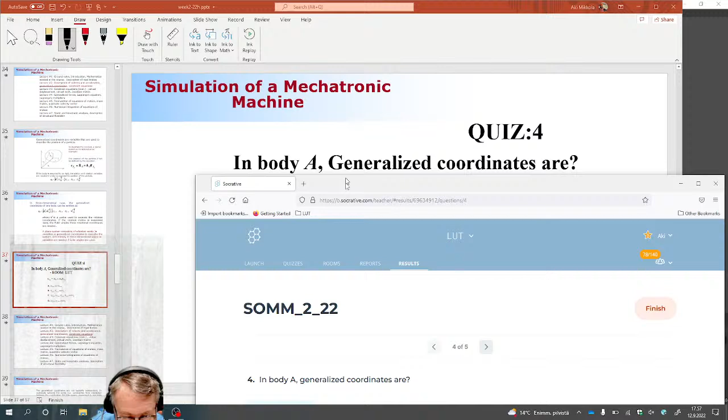Okay, are you guys ready? Oh, let me go back. Can I take this off? This slide. Go back to the Socrative. Five more minutes and then we'll be off. Okay, so let me take myself back here. Okay, so did you already make a conclusion? Okay, not yet. Okay, so are we ready now?

So body A means one body. One body has, okay, let me tell you this much. One body needs what? And the answer is one body needs love. That's not the answer. But what does one body need? Three coordinates. Correct, correct. So it must be the one that consists of three components. Which ones? Okay, so I'm going to take myself to this one here.

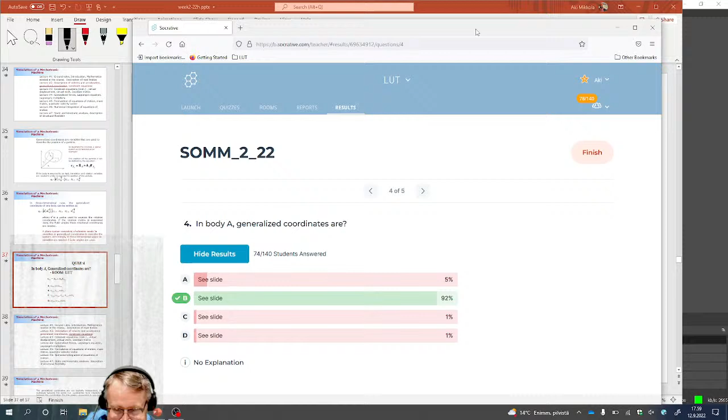So the success rate today, I got 74. I think this is pretty much all the answers today. 74 answers. Success rate is how much? 92. 92. How is the success rate? What are the votes here? Oh, that's you. 92. So I'm saying 100%. Ooh, it's close. What do you guys think? I'm not going to dance this year. No, no, no. I don't think so. Did you dance last year? No, never danced in my career. Okay, but there's always this risk, and when I'm pressing that, so the results, I'm almost like, oh my god, because the red goes this far. It's like, oh my god, it's 100 this time. It's not 100.

Okay, what is the correct one? Everybody needs not love, but three coordinates to describe it. Three coordinates. Okay, and that means that the first one must be off. So it cannot be the correct one. The second one consists of three components, so it looks very good. And this C has too many components, so completely off. D is not correct because vector U bar is what? Constant, not variable. Okay, so what is left is B. So remember this, you can say everybody needs love, and then plus three coordinate systems. That's the way to go.